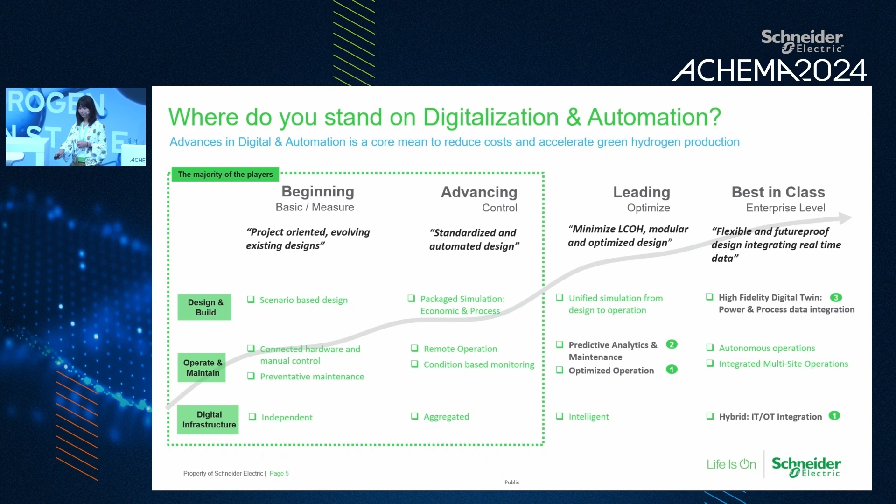So first and foremost, I want to show you the concept here of what we call the open software-defined automation. So over the last 50 years, we see that for industrial automation, we need to make it open to be able to integrate more IT capabilities and to also enable our customers to have flexibility in terms of implementing and opening their vendor selection when it comes to control hardware selection. So what we have proposed is the decoupling of your control software from your hardware, and building this independent application where you can build your control system independently of your hardware selection.

This makes it easier for you to select the different control hardware systems, as well as bridge that gap to incorporate IT capabilities into your automation system to provide real analytics and further improve your KPIs for your operation. This will enable you to have a plug and produce model, a more modular approach that can also accelerate the implementation of your projects.

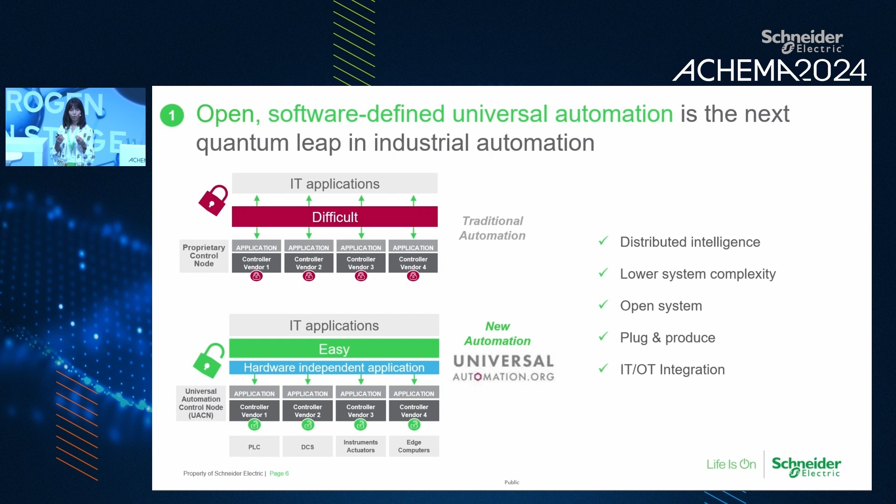And with that as the underlying foundation, we also want to take advantage of the computational advancements with AI and with process simulation to provide further insights for your process. So taking into account the data from past historical behavior to your current behavior to provide this predictive analytics, incorporating AI-driven models to help you detect failures and increase the time to failure estimates. And then in addition, incorporating your simulation models with our AVEVA software solutions that can also increase the range of your anomaly detection, enabling you to have earlier intervention and greater risk mitigation.

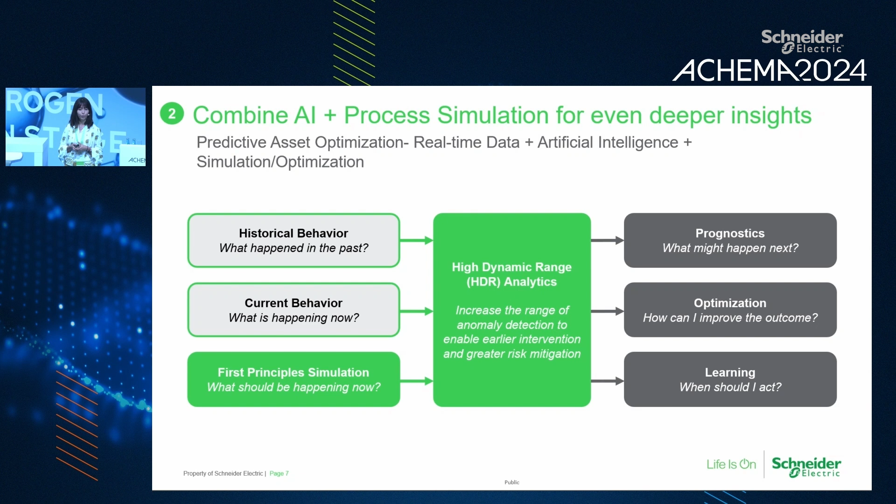So this will give you more predictive insight to know what's going to happen next, how you can improve your production, your process insights, and how you should act, giving recommendations on how you can act and improve your overall process.

And with this, we also have a collaboration effort through our co-innovation lab, taking the example I showed earlier with open automation as well as integration of AI and advanced analytics to build a platform utilizing this open approach. So specifically looking into the electrolyzers. As you know, this is the core process of green hydrogen production. So there are still a lot of unknowns.

So we want to take these unknowns, incorporating advanced process control with advanced sensing in the electrolyzer stacks itself, and then taking that data both from a process and an electrical point of view, and giving those insights to help you with recommendations or set points in the beginning, and then as you learn, as the data matures, to be able to give more of a remote autonomous operation to enhance your efficiency as well as elongate the lifetime of your electrolyzers.

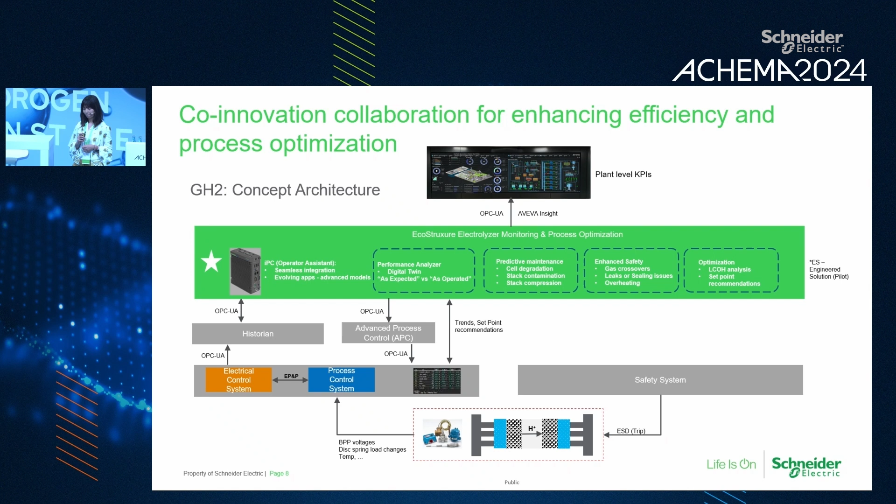And last but not least is the digital twin. So one aspect that we at Schneider, I think it's a key differentiator, is we're able to provide this insight from your electrical input as well as your process. So by providing this integrated approach of process and power, you're able to, especially for green hydrogen production, where the electrical input is important, and it can affect your overall green hydrogen production.

And also obtaining the renewable energy is not so easy, so you want to be able to maximize on what you have, both from your energy input as well as your hydrogen input. So by combining these two, conceptually from your design to build this simulation, and then using the same digital twin for your operational, and also by using the same model to provide, for example, training simulation for your operators, you can make timely decisions for your projects, both economically on the CapEx and OpEx side.

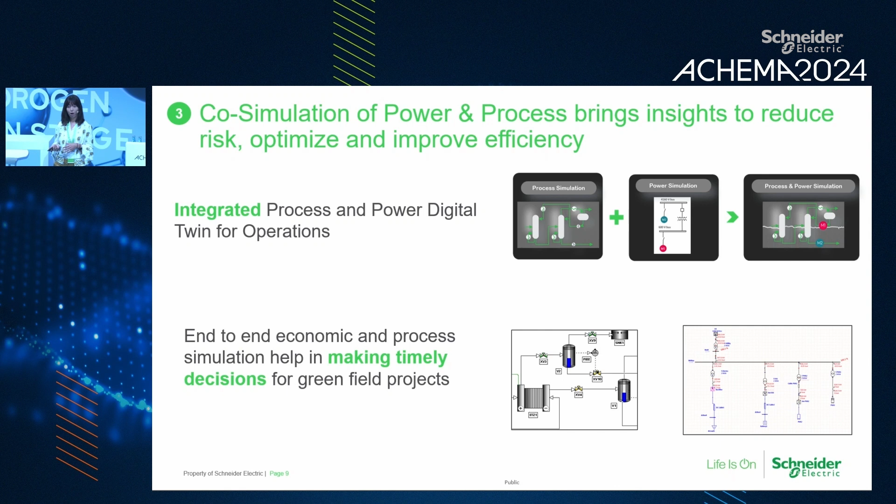And just to give you an example here of what that looks like on the simulation. So as you can see here, we have a combined view taking the input from your electrical sources. So here we show the grid input from the renewables, for example, here on the solar, the photovoltaic power that's coming in, and how that impacts your production of your green hydrogen with the electrolyzer here.

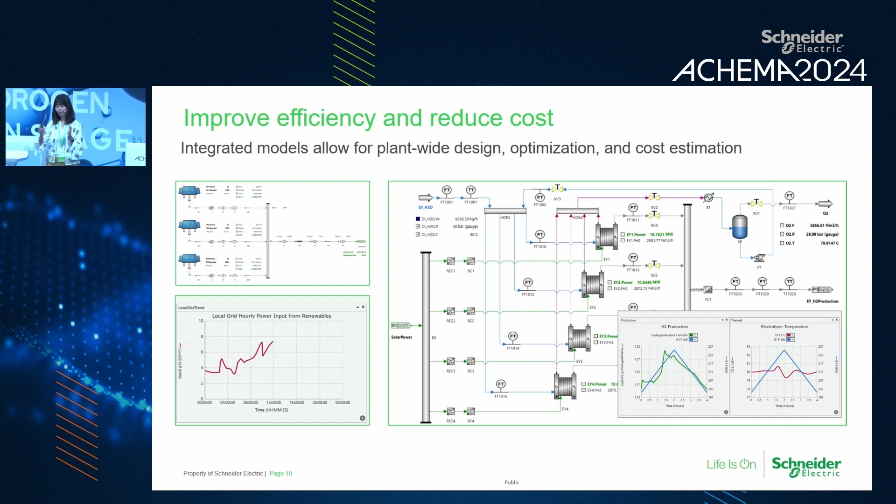And you can take this model from, like I said, your design conceptual state to do what-if analysis, to be able to see your economics analysis, as well as taking this model to build this digital twin for your operations once you have the plant running at a later stage. And with that, I will hand it over to Jana, who will go in further deep dive for our energy management system. Thank you, Roxann.

So our energy management system is a way to optimize green hydrogen production on the operational side. So we want to orchestrate the use of renewable energy resources and the connection to the grid, while ensuring as high hydrogen production as possible. And with this tool, we are able to decrease the operational cost of the green hydrogen production, while achieving low energy costs and sustainable power consumption.

So we use the latest AI technologies to evaluate dynamic parameters in short intervals, such as green energy market prices, weather forecast, and the hydrogen demand on site. You can see in the upper right corner the cutting-edge web-based user interface, where you can see the energy consumption, savings, and CO2 emissions. And with these tools, we are able to achieve predictive production planning.

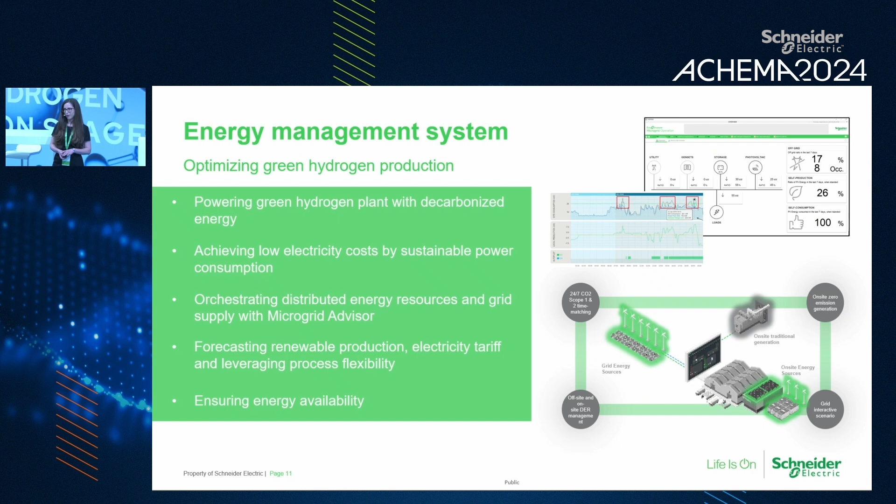Schneider Electric is able to offer the systems for industrial green hydrogen production, so high scale, but also for middle size or small size with the microgrid advisor, which enables the island or microgrid operational mode. And as an example where we applied this kind of system is our H2 power plant project at Vilo Park Dortmund, which is an example of an innovation with impact, as we like to say in Schneider Electric.

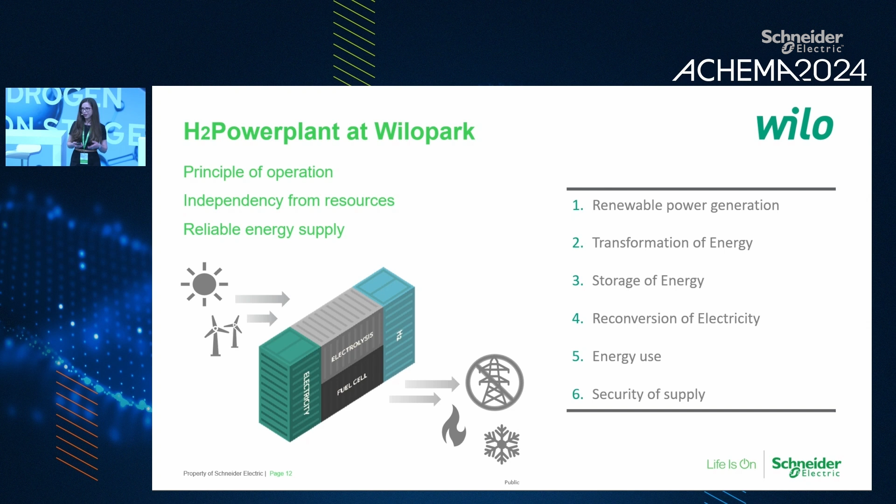And this is a solution for green hydrogen electrolysis produced from renewable electricity, in this case solar energy, converting purified rainwater through electrolysis to green hydrogen. So in this case, we are able to produce up to 10 tons of green hydrogen per year, which is saved for further use. And we can offer this solution together with Wilo as a containerized, standardized solution, which is then tailored to specific customer needs. So it is a modular system which can be fitted to specific requirements.

So here about the solution overview, you can see that the core of the system is electrolysis, and Wilo has expertise in water treatment, water purification, and water bearing systems, which are crucial for green hydrogen production. We can use, as I said, rainwater, which is highly purified, for the electrolysis process. As the renewable energy source, we use a solar power plant, but it is also possible with wind or with electricity from the grid. We have a battery storage which can buffer the process to avoid high pressure drops at system run up or shut down, so we can ensure a longer lifetime of the electrolyzer.

And part of the system is, in this case, low pressure hydrogen storage. It is also possible to implement a high pressure storage, which can enable us to use the hydrogen, for example, for transportation. And we can supply the green hydrogen for different production processes, through methanization or directly to the gas grid, or we can implement a fuel cell which can convert green hydrogen back to electricity in case of need, and balance electrical loads of the system, or use it further for e-mobility, or supply back to the grid in case it is economically sustainable.

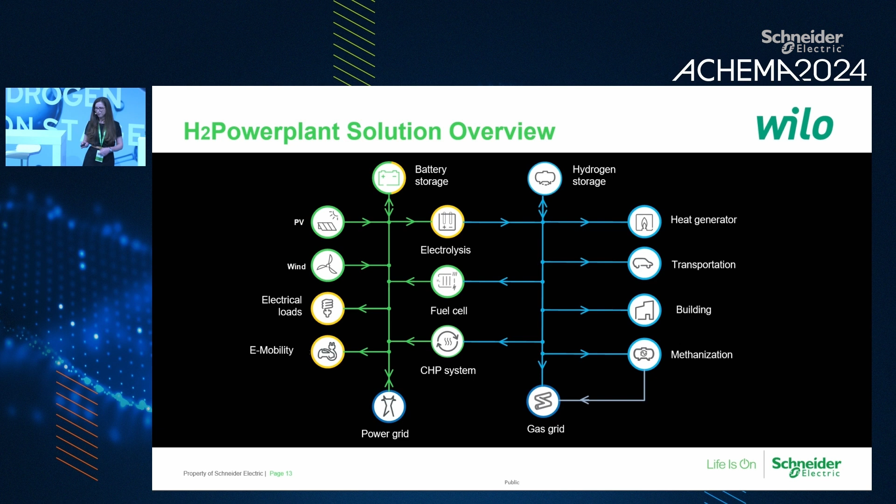And here I would like to speak more in detail about what Schneider Electric supplied to the system, especially regarding our system, our software solution. So we delivered the centralized control management of different systems. It was important that the whole system is interoperable and that it can be integrated with the building management or with production processes, production systems of Wilo, which is the case.

So our microgrid advisor is a solution which is orchestrating the different energy resources together with hydrogen supply, with hydrogen storage, and ensuring that the system is connected to the customer's power system according to his requirements, and also ensuring the low cost of produced hydrogen.

And then we delivered also a connected automation solution which controls the process: the electrolyzer, fuel cells, battery system, and hydrogen storage, all the valves, pumps, and so on, including hardware, PLC. And the third layer of our solutions are connected products, the classic offer of Schneider Electric, which is an energy distribution system.

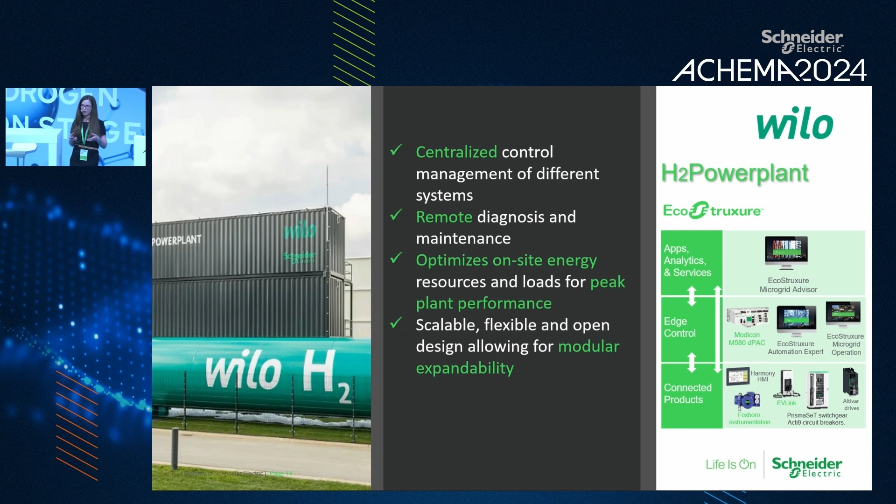And to conclude, what is the first step if a company decides to start a journey with green hydrogen? It is important to set a clear strategy and timeline when you want to reach your goals. In this regard, we are always happy to help in Schneider Electric with our consulting services. We can offer an end-to-end solution with energy and sustainability consulting, tying the consultancy service together with the end solution engineering.

And we have a base of our design engineering tools together with Aveva, which is the world leader in optimizing operation and design software and industrial information solutions, and then our interoperable Schneider Electric platform for the automation solution for the power systems, enriched by the ETAP electrical digital twin, which enables connecting the power and process together.